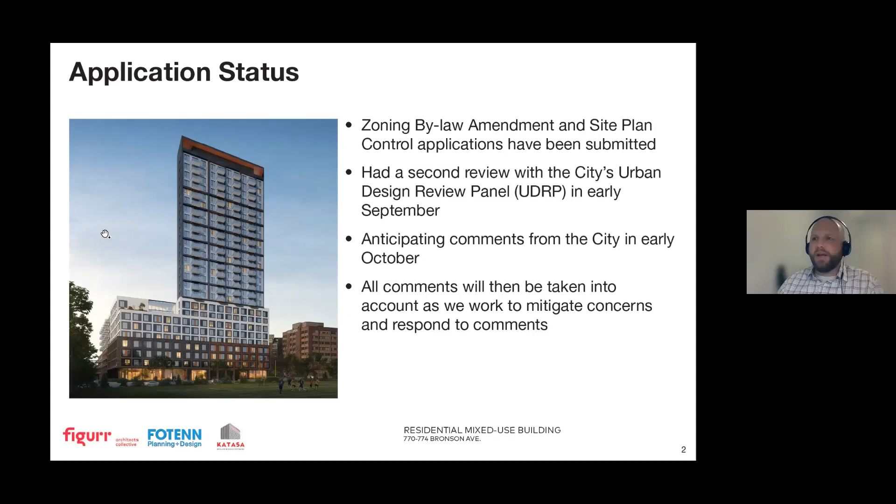In terms of the site context, you're all fairly familiar, I'm sure, with it, but the southwest corner of Bronson Avenue and Carling Avenue, two arterial roads, important arterial roads in the city for sure. Well connected to bike trails along the canal, obviously, and throughout the Glebe, but also through the Glebe into the downtown core along the different O'Connor Street bikeway to the east and Percy Street bikeway as well. There's a fair bit of development happening in the area.

This just summarizes a few of the recent applications or approvals that have gone through, but it is an active area, obviously. The site's across from Glebe Collegiate and from the football field on the east side of Bronson Avenue.

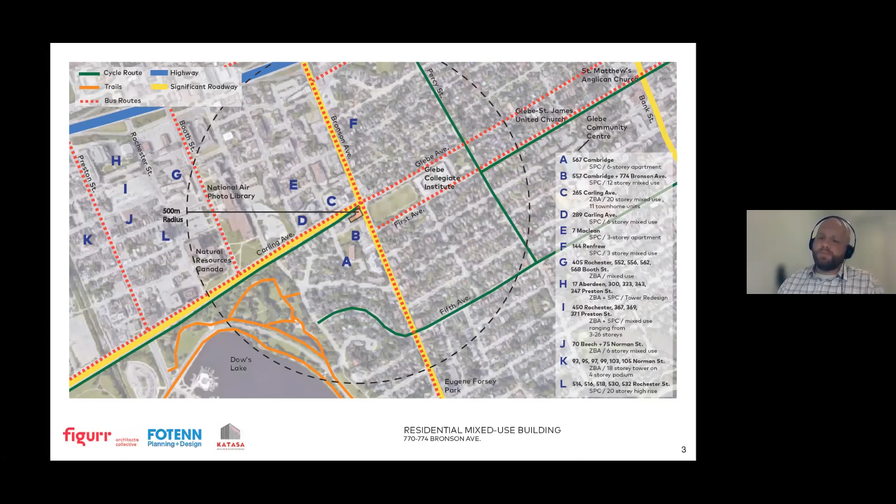And it is sort of an L-shaped property. So it does include both 770 Bronson, which is right on the corner, as well as 774 Bronson and 557 Cambridge, which is the through lot between Bronson and Cambridge. And as I mentioned, both of those have been subject of previous applications separately. This proposal would consolidate the properties into one.

In terms of just a quick policy overview before Roberto jumps into the building design.

Carling Avenue is an arterial main street in the city's official plan. Arterial main streets are target areas for intensification within the city, meaning they're intended to intensify given their function. They move a lot of vehicles, but they're also a focus of transit throughout the city, generally transit priority corridors.

In the case of Carling Avenue, there's a future LRT to the west of here, west of Carling Station today. Generally, building heights on arterial main streets are up to 9 stories, but at specific nodes, the official plan contemplates building heights over 10 stories, which the city defines as high-rise buildings. One such node is identified directly abutting the intersection of an arterial main street with another main street, or with a transit priority corridor, identified on Schedule D of the official plan.

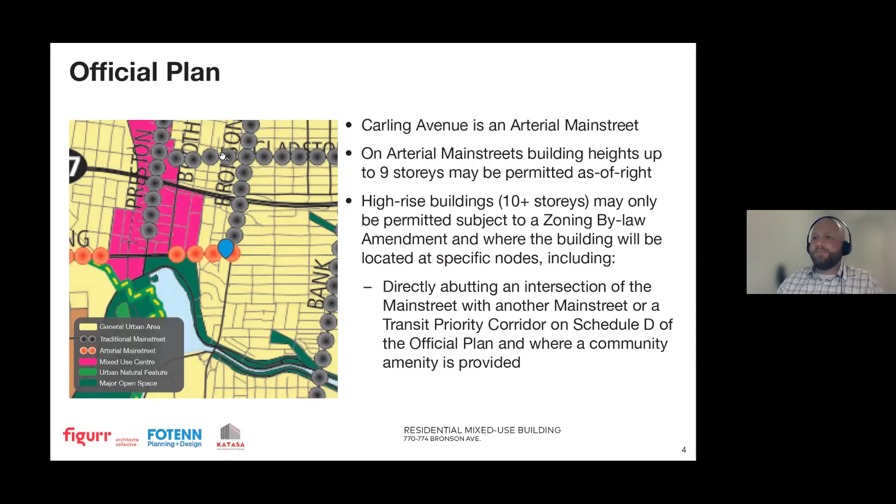In that case, a high-rise building may be permitted with a community amenity as well. This is Schedule D of the official plan, the city's rapid transit network. You can see the subject property identified at this corner here of Carling and Bronson.

Carling Avenue, east of Carling Station, is a transit priority corridor with isolated measures, as is Bronson Avenue, north and south, a transit priority corridor. So the site satisfies the nodal criteria for consideration of a high-rise building.

The Carling Light Rail Station, closed right now but reopening as part of the expanded Trillium line, is approximately 850 meters west of the site, straight down Carling Avenue.

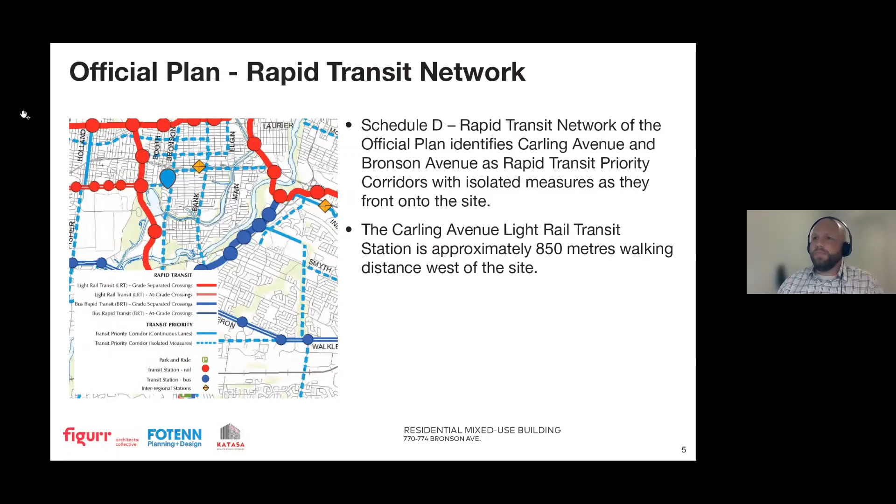In terms of the zoning on the sites today, it has 2 separate zones. The 770 Bronson corner is zoned AM10 with special exception 2373, based on the previous proposal for the site. Then 774 and 557 are in the AM1 subzone with exception 2003 and a schedule addressing building height and setbacks, again based on the previous proposal for the lands.

So we're seeking to rezone the lands as one parcel with an AM10 zone. AM10 is a subzone containing special provisions regarding transparency and glazing adjacent to the arterial main street, as well as a minimum required building frontage along that street. It's intended to create more urban and active main streets, and it applies along much of Carling Avenue.

The zoning amendment also seeks to address a couple of performance standards - interior and corner side yard setbacks, as well as building height and permission for stacked bike parking, which was recently adopted by the city as an update to their zoning bylaw to permit stacked bike parking. We've also requested this as part of the amendment just to be certain it would be permitted.

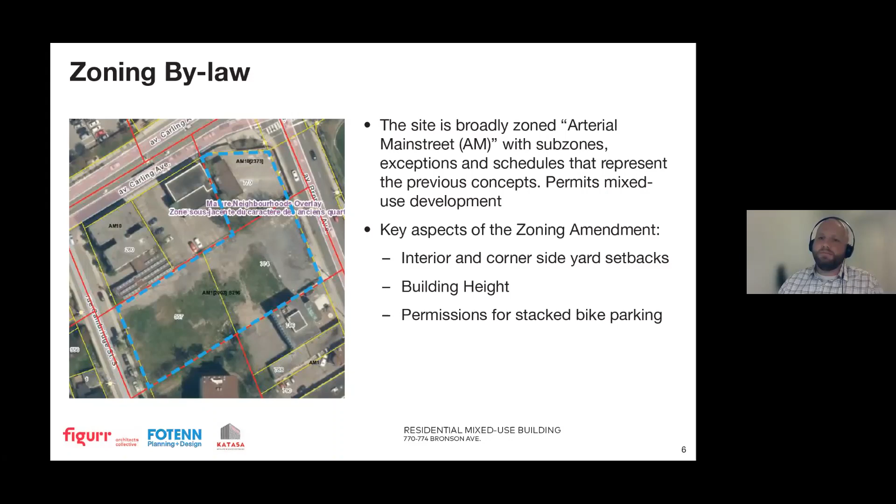One of the comments we've heard from UDRP and from some of our preliminary conversations is a concern about the proximity of the tower, which is proposed in this general location, to these properties here. The city has urban design guidelines for high-rise buildings.

Specifically, it addresses the design of the buildings - angular planes to transition to low-rise - but also the size of properties that would be appropriate for high-rise buildings. We've looked at these 2 properties, 280 and 270 Carling, and neither property on its own would meet the size requirements for a high-rise building.

The city has a minimum area of over 1,300 square meters for consideration of a high-rise building. And then also...

If we assume, though, that they would someday be consolidated and a high-rise building built on it, we've also looked at that. In our opinion, we would site a high-rise building in this northwest corner of the site. We just think that makes sense from a site layout perspective - not that we're designing that site, but just trying to think through the separation between a future tower if it were permitted.

I will say the current policies for 270 and 280 do not permit a high-rise building. As I noted, the arterial main street policies specify that it needs to be at the intersection of the arterial main street and the transit priority corridor. But the new official plan does contemplate potentially high-rise buildings in other places along main street, which is why we wanted to look at this more carefully.

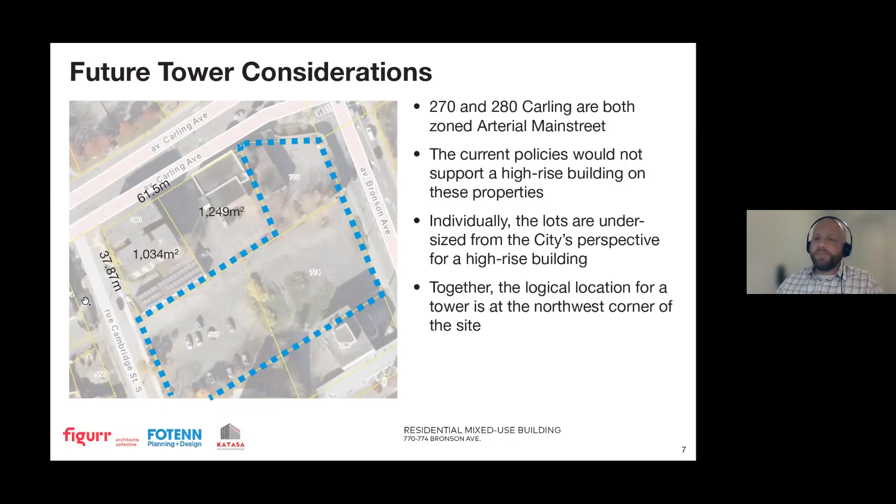But for now, this has been our analysis to date on these two properties and the proximity of the tower. So with that, I'm going to pass it over to Roberto and allow him to walk you through the design of the building. Great. Thanks, Paul.

My name is Roberto Campos. I'm a partner with Figurr Architects. I likely presented to many of you about a year or so ago when we had our first go around, and we certainly took some comments. As Paul said, we've now been to the UDRP twice, one informally, one formally, and have gotten comments back and forth that we've tried to incorporate into this proposal as best we can. I think, as Paul mentioned, one of them is certainly the setback and the width of the tower itself.

What I'll do quickly is go over the overall project proposal. What is being proposed is a 2-phase development. Phase 1, which runs along Bronson and the intersection itself, would include up to a 9-story mid-rise section that would be supporting primarily student housing or cater towards students, and then a tower up to 26 stories above from 10 up that would be more of a traditional apartment building complex. The ground floor you see here is made up primarily of amenity spaces.

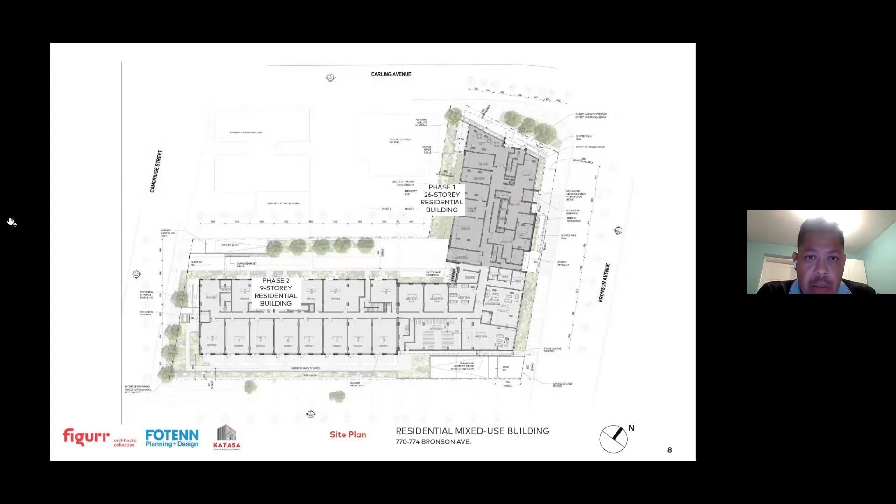Yeah, so this is the proposal. In our initial proposal for the project, there was a continuous 9-story podium from ground right up. What we've done now is set back the fifth floor of the project just shy of 2 meters, and then ultimately what we've also removed is a significant portion of the southeast corner of the property.

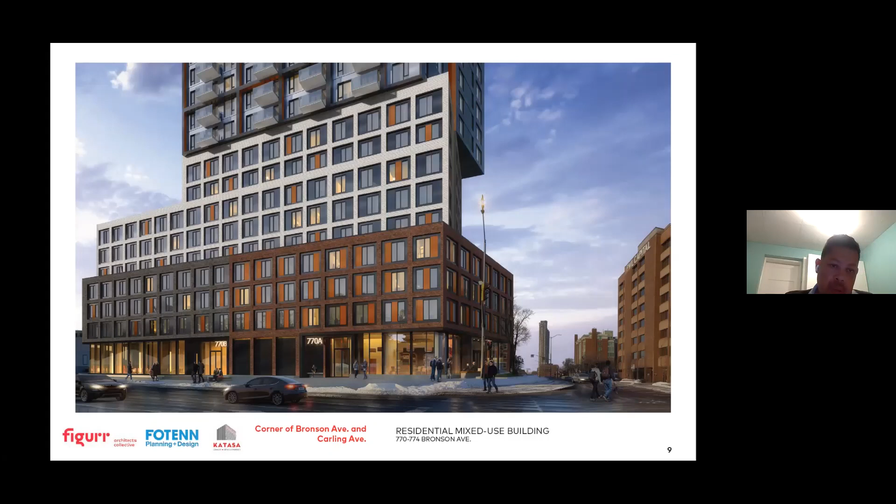I don't know if you can just point to that, Paul. Exactly right up there, to create another transition point. It's going to, right now, be proposed as a small outdoor amenity space accessed by the students.

Another major aspect we've done is to look at the setback between the west property for the tower separation. In the initial proposal, we were, I believe, a little bit over 3.3 meters in setback. We've now increased that to just shy of 7. As Paul mentioned, we're also trying to see if we can increase that a little bit as well, under the notion that we don't believe the adjacent property, as individual properties, can support towers, even if it was allowed—they're just too small to make them work as towers.

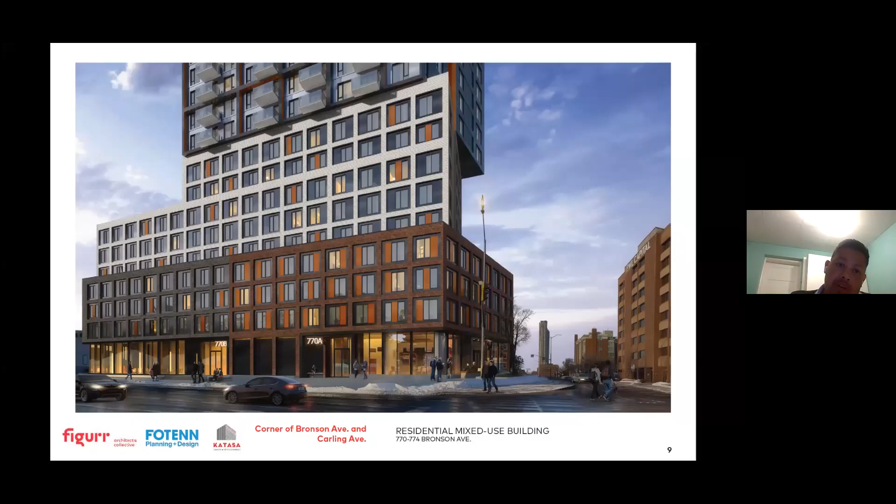However, as Paul mentioned, if they're ever assembled as a single property, I think it would be very prudent that they would likely put their tower location or anything of height on the western portion of that property against Cambridge Avenue. So we feel that we're not really too concerned necessarily about a future tower, and that we're providing that sense of separation.

As you can see in this image, the idea of the ground floor is primarily open as part of the arterial Main Street zoning requirements. We have a 4.5 meter ground floor with a significant amount of clear glass to provide an active experience at the pedestrian level. Our actual building is set back further than the property line.

Along Bronson Avenue, part of that is to create a much more engaging pedestrian space at that ground floor. We are providing a small coffee shop on the western side of the intersection, right in that area there, which would be provided by the landlord or owner of the building.

I know there's been discussions about whether we can try to get retail onto the ground floor. It's a bit of a chicken and egg scenario. We can, it's certainly able to support it. The challenge is that we can leave it for commercial space, but because of the way Bronson is designed as a street, it's just not a very car parking accessible space. So you have difficulty getting it rented to anybody, and you end up with a lot of for lease signs. I think the client is willing, and as Bronson develops over the years, if demand is there for commercial retail, it's certainly designed to support it if needed.

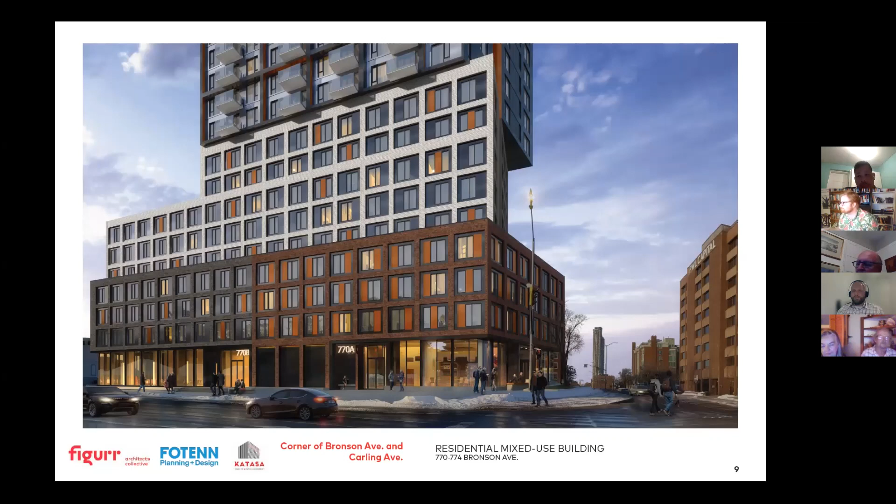Can you go to the next image? This is a view from the football field at Glebe Collegiate. As you can see, we've tried to push on those transitions at the 4th floor and then up at the 7th floor to create some relief and setback conditions on the facade before we transition to the high rise. It was very important for us to look at materiality at those lower levels, so we're using masonry as our primary material with infill panels, either metal or a cement board panel.

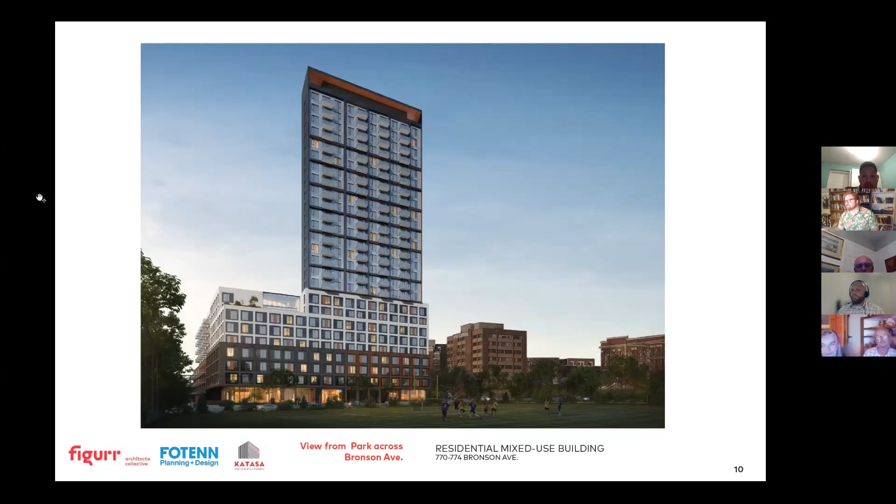Next image. This is a bird's eye, again looking west. As you can see, the intersection was very important to us to try to create, as Paul said, something that is about a node at this intersection of the city.

I live on Flora, so not very far from here, I know it quite well, and I've seen that the black fence has really been the dominant feature over the last few years. So the idea was to try to create a much more engaging intersection. We've set back the 5th floor to the 9th floor on a different angle than the ground floor to the 4th, in order to create that podium experience at that intersection, and then again trying to play with the volumetrics at the tower.

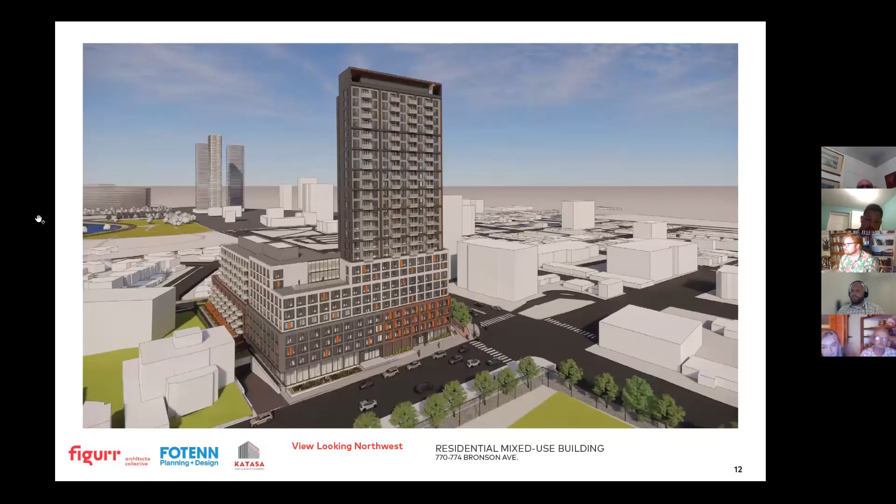One of the comments we received from UDRP was whether we can lower the building on the Cambridge side so that the 2nd floor of the Cambridge side building would line up with the ground floor of phase 1. Right now they don't line up perfectly as the floors go up. That's primarily due to zoning, since phase 1 is on an arterial main street, requiring a minimum 4.5 meter ground floor, whereas on the Cambridge side there's no commercial, so it doesn't make sense to have a 4.5 meter ground floor - it just doesn't make for very nice units, it actually becomes very cavernous.

The problem is you end up with around 1.5 meters difference as the building goes up. So what we're going to try to do is pick that up by lowering phase 2, which we're looking at right now. It really is about the challenge of parking - the site drops between Bronson and Cambridge by a little over 1.5 meters. So we're looking at that right now to make sure we can make it work based on how it works with the parking. If we can do it, we'll certainly be exploring that very seriously.

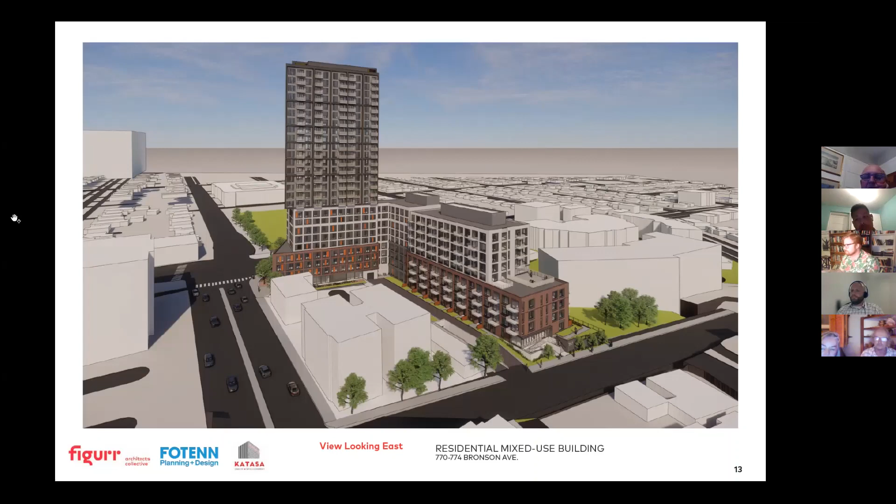This is the view looking south, directly in front of the current office building at the northwest corner. As you can see, we really tried to emphasize those 4 floors of podium and the clear glass at the intersection before we step up to the mid-rise and then the high-rise.

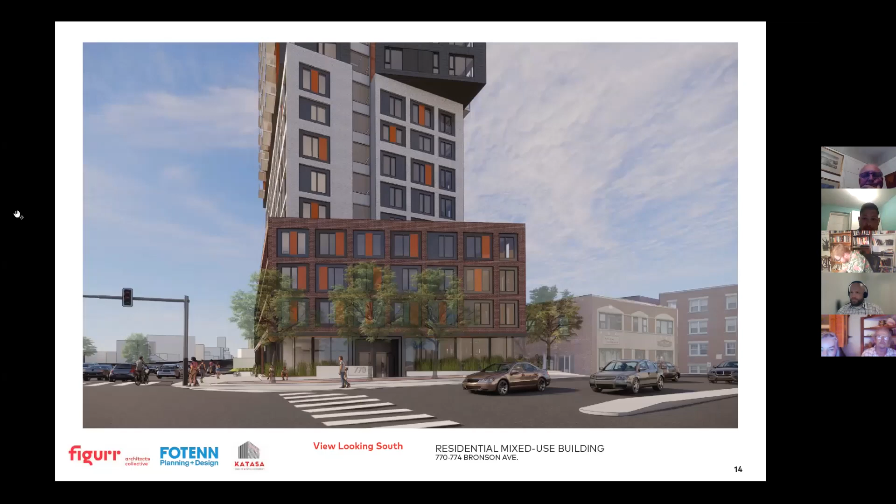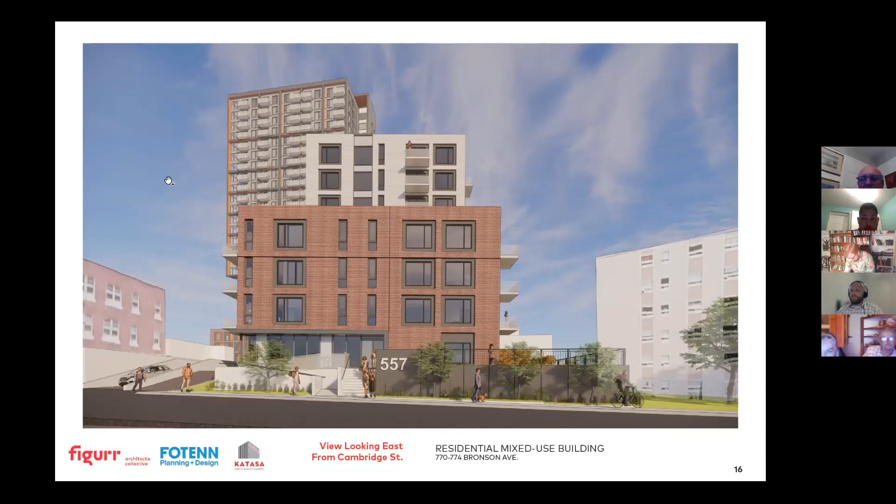Can we switch slides? Oh, sorry, it's just lagging. That's all right. Again, quick view of the intersection. Bit of a lag, sorry. Lock up on you. Yeah, sorry about that.

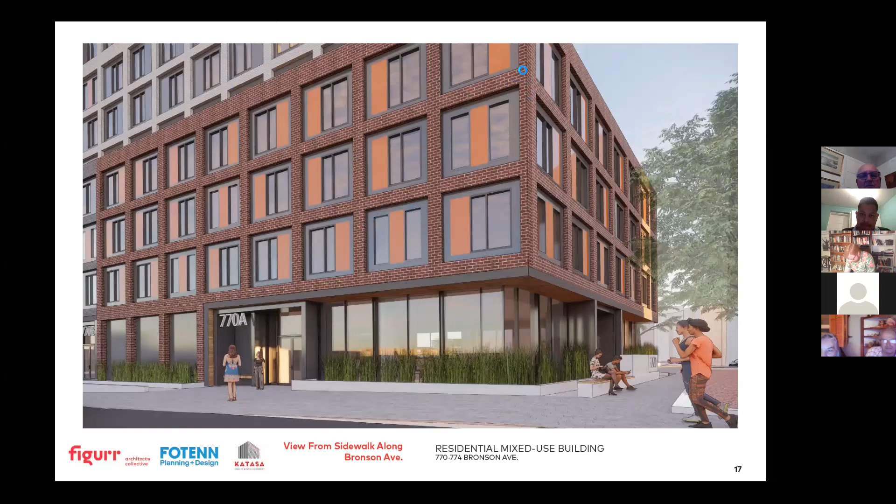Bob, I see you have your hand up there. We're going to take questions at the end, but given the little hiccup here, do you have a quick question or is it a longer one? You're on mute, Bob. Maybe we'll continue for now, and then at the end, Bob, you'll be first up.

Okay, thanks very much. What we've added here is a few more drawings that highlight the angular plane requirements as required by the high building guideline. As you can see, based on this requirement, the building actually misses it entirely and stays within the actual angular plane. You can see even at the 4th, as it transitions to 9, and then as it transitions up to the tower at the intersection, we're missing that.

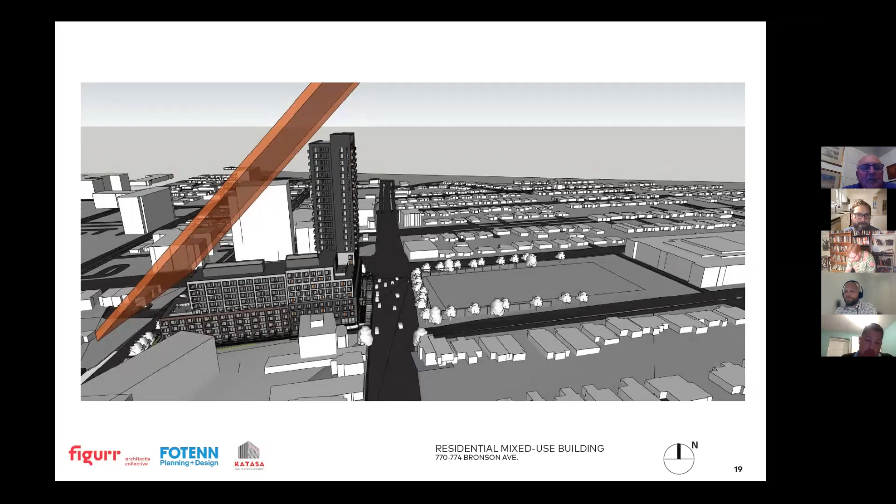Next slide, we'll show it from the others. Okay, so here's some additional shadow studies we did. This is combined March and September, the equinox dates, which tend to be almost identical with regards to the shadows. We've taken them at 8, 10, noon, 2, 4, and 5:30. You can see that at 8 a.m. there is a bit of shadow as it grows over west onto Carling.

There is a new building about to start construction fairly soon across the street on Carling, which I believe is slated to be 16 stories, so that really is going to provide more of the impact into that northwest neighborhood. At 10 o'clock it starts to rotate clockwise, by noon it's pretty much over the intersection, at 2 o'clock kitty corner, and then 4 over the football field. By 5:30 in March/September, it's starting to get dark, with nighttime hitting basically around 7, a little after 7 o'clock.

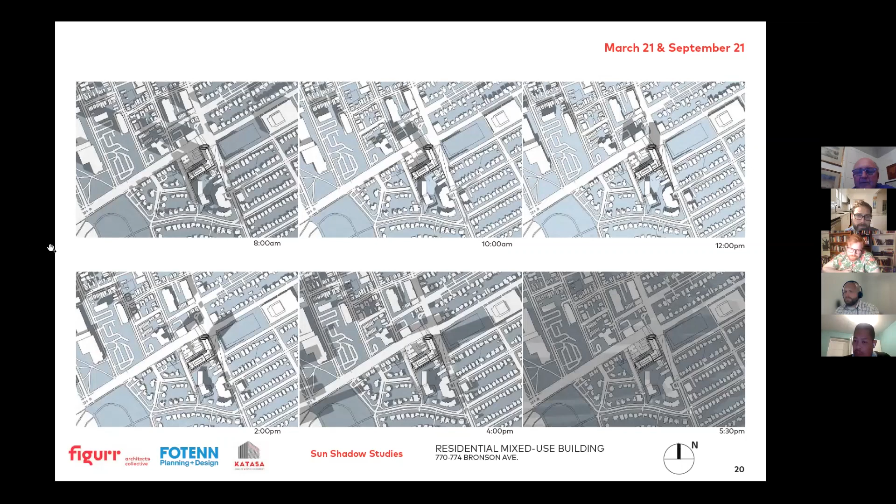Into June, obviously the highest sun days: over Carling, still over Carling at 10, just into the intersection at noon, just touching the football field at 2, over the football field at 4, and then starting to get into the neighborhood at 5:30.

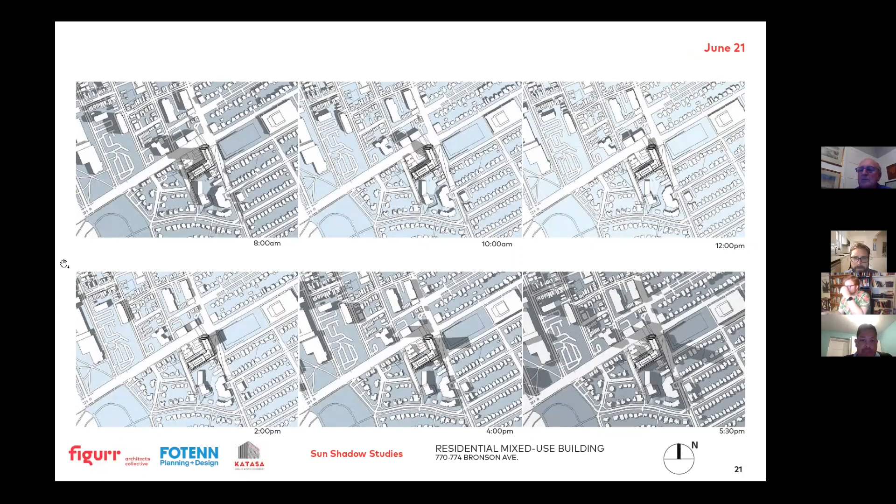December, obviously shadows are much longer. At 8 a.m. it's still kind of getting dark, the sun is just starting to creep over. At 10 a.m. you're starting to see the long shadows. Noon, over Carling towards the north, again northeast at 2. By around 4 o'clock we're pretty close to getting dark. I know that by 5 o'clock it's pretty dark, nighttime in December.

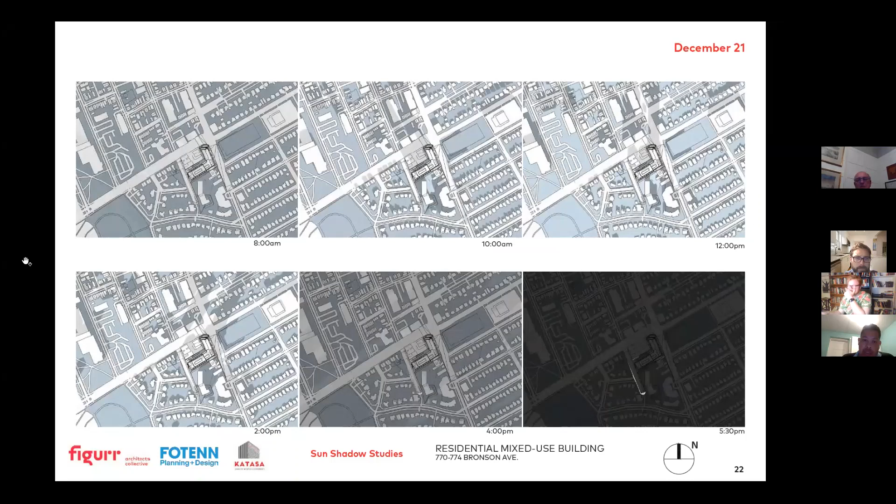Some sections, you can see the red, and this is where the cut line is in that little image in the top left corner, cutting through phase 1 and phase 2. The red identifies what the initial proposal before this one actually had zoned, up to 12 stories, I believe.

You can see that even on Cambridge, we're set back a full grid bay, 6 meters, and then another grid bay, so we're close to 19 meters from the property line. Because of the angle of the property there, it's between 16 and 19 meters along grid line 3, and we're staying just shy of the max height on that side. As it hits closer to Bronson, we're actually three stories lower, and we've added at the 4th floor along Bronson a 1.8 meter setback before it hits the 5th floor.

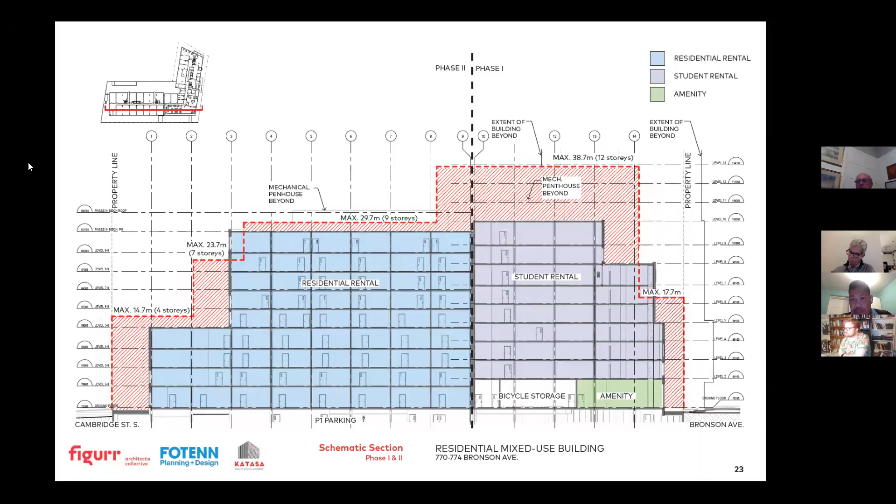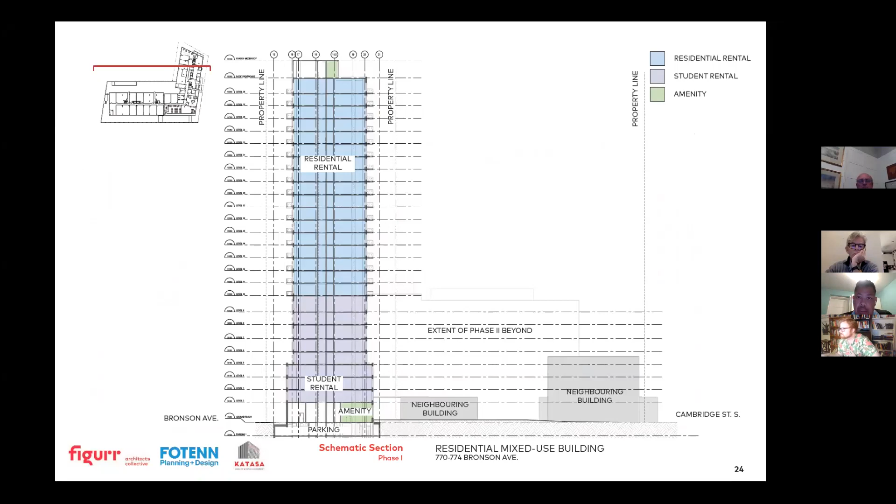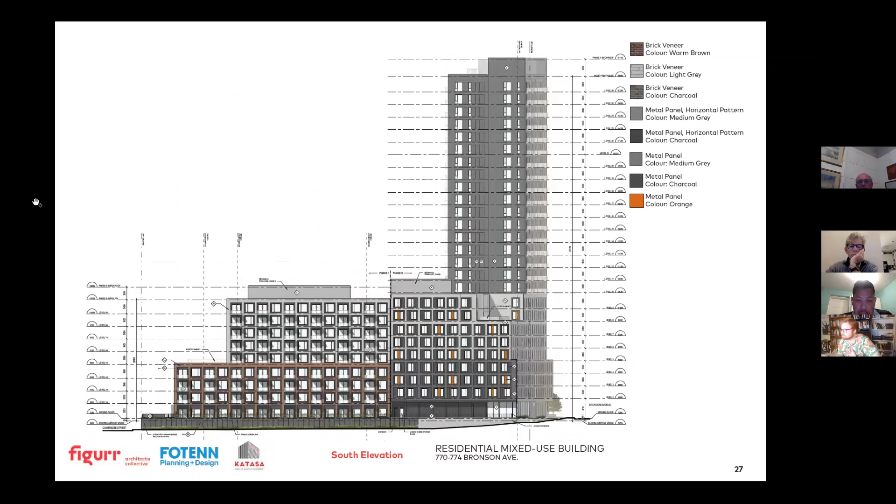So some of the elevations, again, looking at materiality and the gridding, color palettes that we felt were appropriate, again trying to use the masonry as a big component to the low and mid-rise sections of the project. Here you can see the differences in height as it gets to the 2nd floor. And again, if we can lower it, if we can make the garage work, then we'll certainly look at lowering that phase 2 section to line up so that the floors align from the 2nd to the...

This is looking east on the Cambridge side.

I think that's probably it. Yep, yeah, that's it.

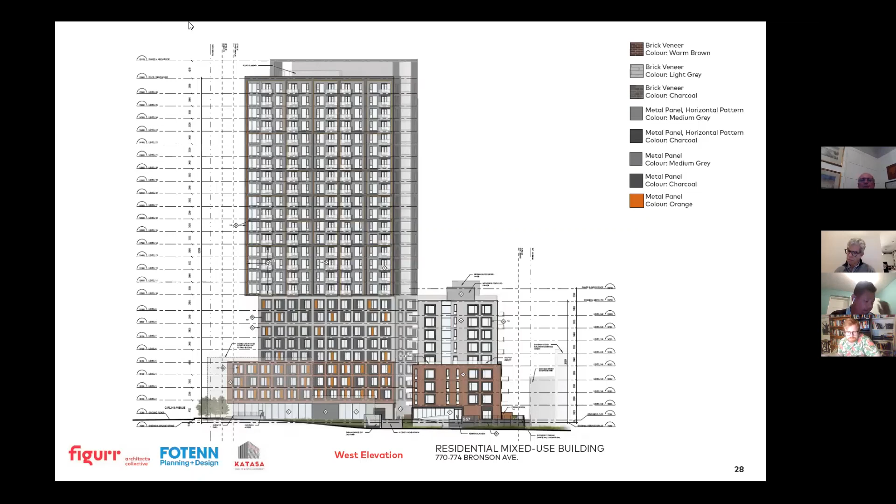All right, thanks for that, Roberto and Paul. Appreciate you walking through that, and a couple things you mentioned with the UDRP response—there's a lot of remaining concerns we're getting, and I'm sure you'll hear them tonight. I think the piece with this application is we want to make sure we can find some common ground, because as it stands right now, there are too many concerns in the community for this to just move forward as is. So we're going to try to find some common ground on this.

So I think, Bob, you're up first. Are you able to unmute? I am, now. Okay, great. Now I am—I found the unmute button.

So, first of all, I think it's quite interesting—we were looking at the plans you had a year ago, and you've made some changes, and that's appreciated. But I think the concern is still the mass and the height. It's just too big for the site from our sense, our reading of this. It's too big for the site, it's too big for the community.

And we can understand how you could do 9 stories—9 stories is what's allowed by the current planning requirements, and we can see how that fits. But we can't see how you can justify 26 stories. So what...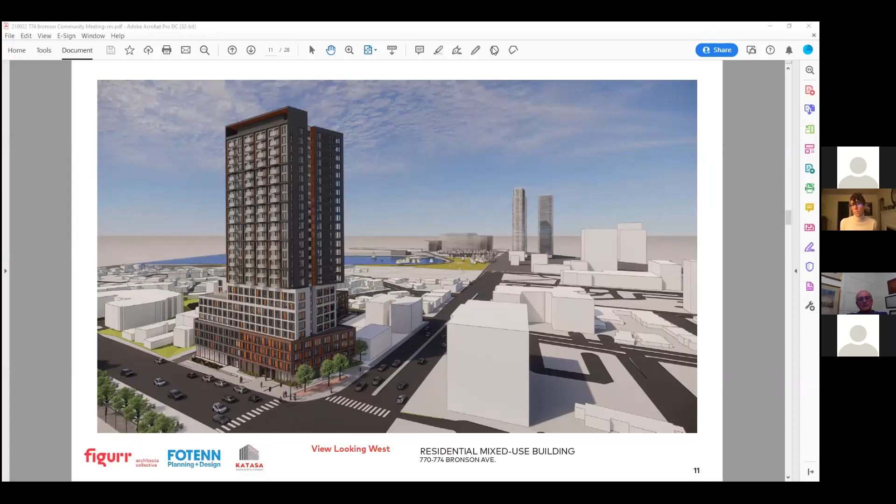That's 174 cars in the parking garage, plus their guests, 25 spaces. All this extra traffic is going to be spilling out into these two streets trying to get in and out. People coming into Bronson from southbound are going to have to cross a lane of southbound traffic. That's going to be almost impossible.

If you're coming from the north, entering in will be okay. If you're coming out on Bronson, you'll be able to go south with no problem. If you want to turn north, it's impossible to do. So you'll be going out the Cambridge Street exit.

Now, you talked about some of the things that Cambridge Street exit is going to support - that's the place for move-in, for deliveries - but I think you've neglected the garbage. The garbage trucks are going in there as well, is that correct? Yes. Okay, so what you've got is a significant amount of traffic coming out of the building and also going in, for moving, delivery, and garbage out on Cambridge.

And that is going to have a significant impact on the traffic flow through the Dow's Lake neighborhood. Because if you decide to come out of there and want to go north on Bronson, you've got to cross two or three lanes.

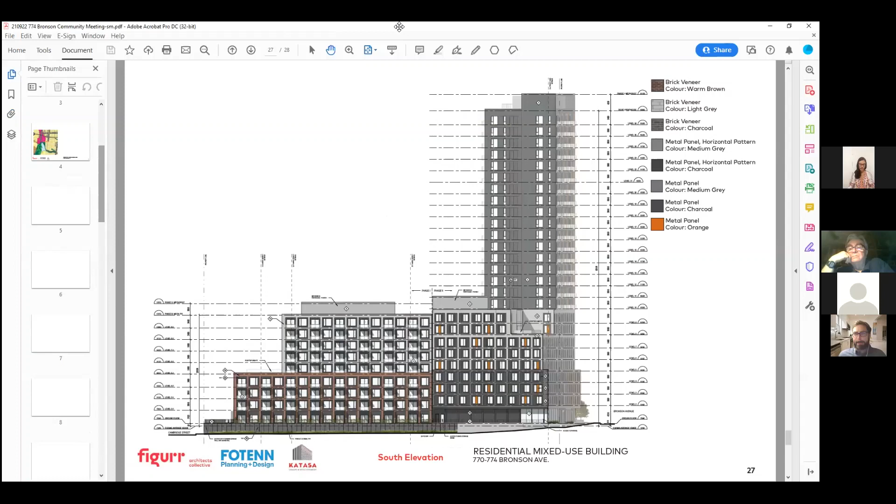Just on mute there, Christy. Oh, you're still on mute. Or you're still on mute there.

Hi there. Can everyone hear me? Yes. Excellent. Okay, so...

I'm a planning lawyer, just out of full disclosure, so I always come at this from a law and policy perspective. As of right, in light of the location of this site, at the corner of Bronson and Carling, 9 stories is permitted. And you have noted that if certain criteria in the official plan are met, you can exceed that 9-story height. One of those criteria is having a community amenity.

I noted that in the planning rationale provided, it states that a mid-block pedestrian connection is provided as a community amenity.

However, I've worked on a number of projects and proposals, and there's another recently approved proposal by the City of Ottawa that springs to mind. It was also on Carling Avenue, a little bit further down, not at a corner. It involved an 18-story building.

But at that site, the developer chose to leave ample space. They included an on-site park, ample green space, and a turning-in access point. Some of the loading and parking was dealt with on-site, and other factors like that.